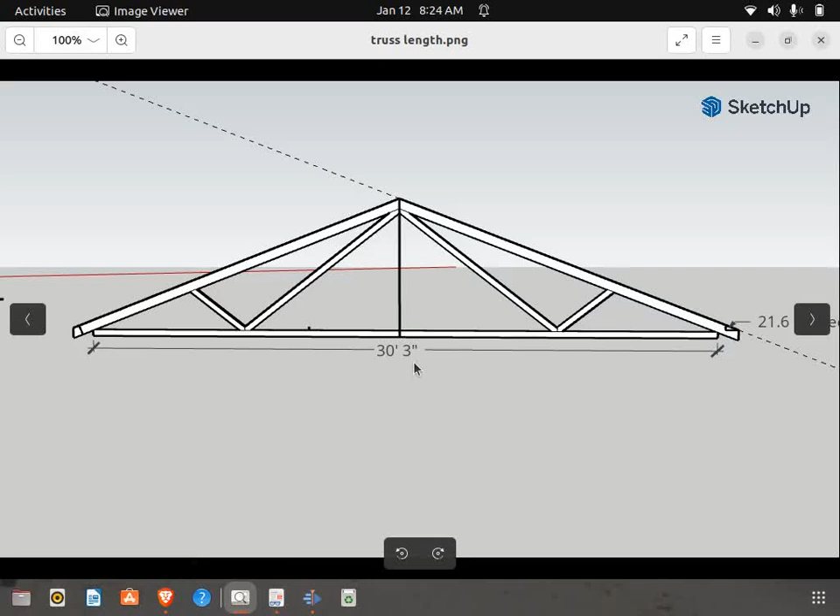We're going to be using a 2x4, which is 1.5 by 3.5, and a 2x6, which is 1.5 by 5.5. Please note there are 3 supplementary views. The first shows the length of that bottom board, which is 30 feet 3 inches. The second one gives the distance from the bottom to the peak, which is 6 feet 9 7/16. And the other one gives the angle for our 2x6, or 1.5 by 5.5, of 21.6 degrees.

You have the option to rotate that board using that measurement, or you can figure out other ways to do it. I just want to give you the most amount of information possible. Okay, so we're going to look over at our instructions.

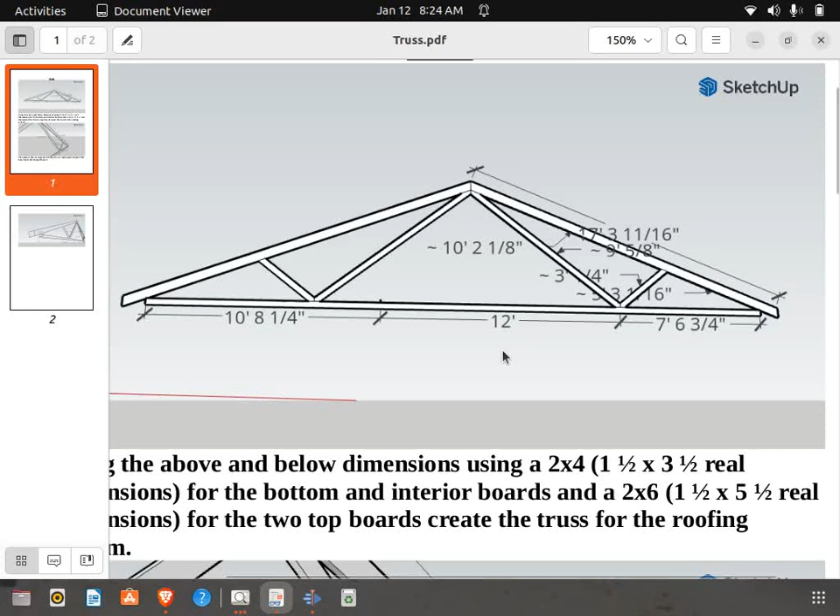The 2 main dimensions I'm looking at are this bottom board, which is 30 feet 3 inches, and the top board, which is 17 feet 3 11/16. So I'm suggesting that you start with those 2 boards.

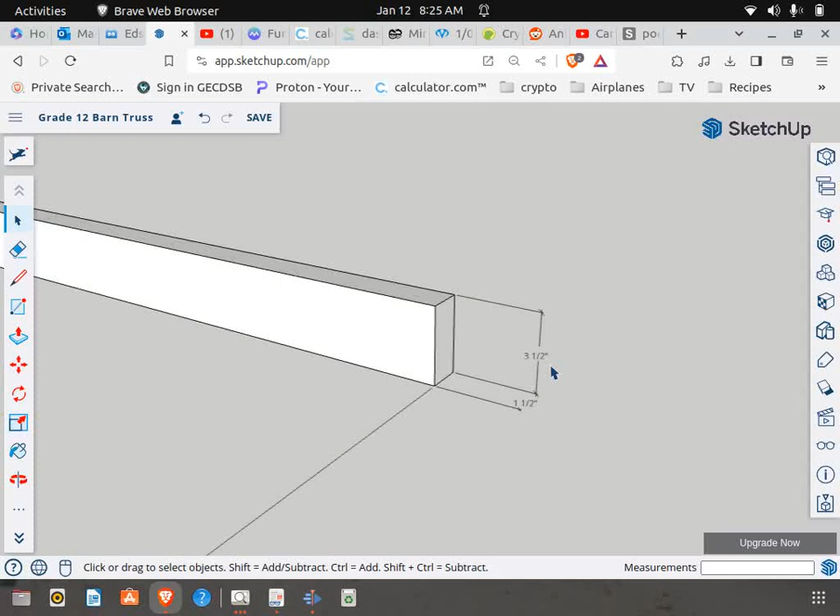Here's my 30 foot 3 inch, it's my 2x4, measuring 3.5 by 1.5. And this board is not to the dimension, the 17 feet, etc. I made a little extra just so that I've got some room to trim. And then you'll just edit that component.

So I'm going to remove the dimension tags or layers, and then we can work from here. Now the first thing I'm going to do is look at the supplementary view that shows that height, 6 foot 9 7/16.

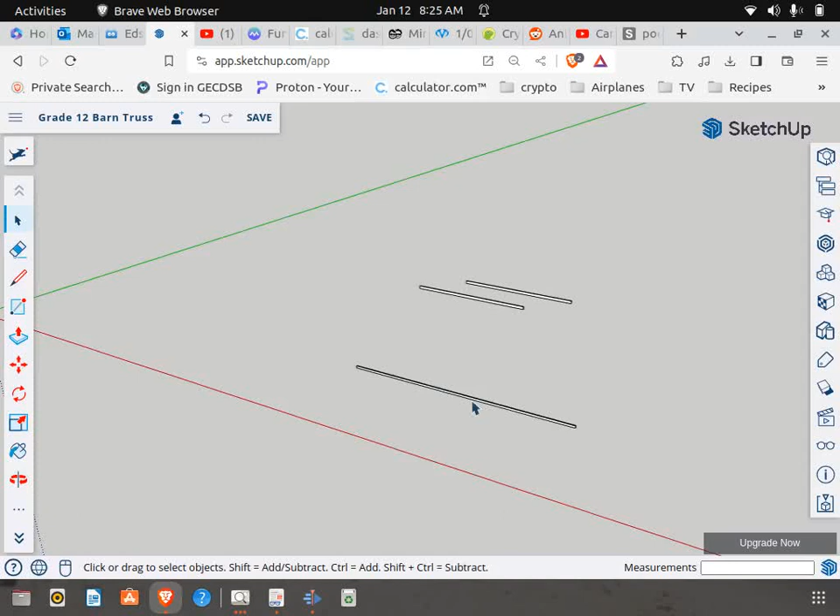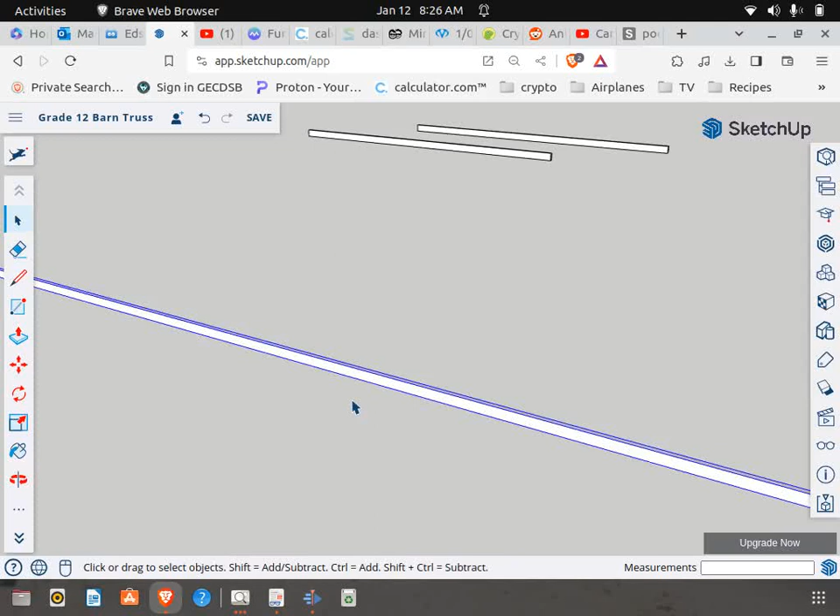Let's go over here, and I'm going to copy this board because we're going to need more than one 2x4. First thing I'm going to do is make this unique. Otherwise, your changes will be felt in all the other copies. Let's go into edit component mode.

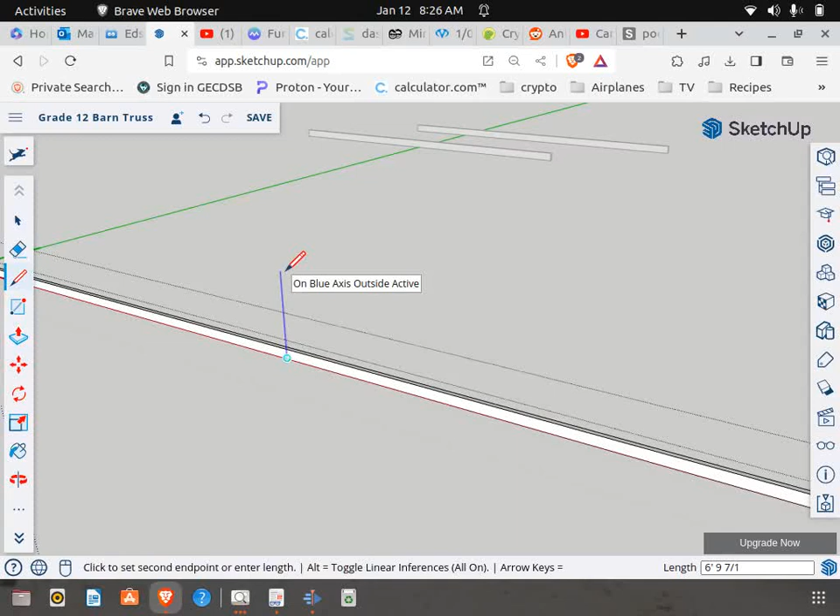That's 6 feet 9 7/16. Let's find our midpoint. Okay, so 6 feet, space, 9, space, 7/16 inches. There we go, that's the height.

Okay, so we've gotten started. Let's look at our supplementary view that gives the angle. I'm going to rotate that 21.6 degrees.

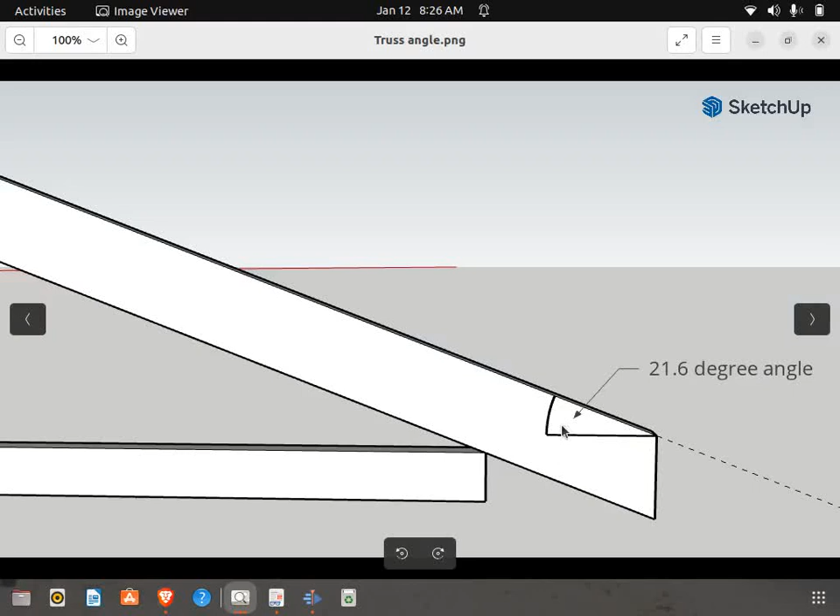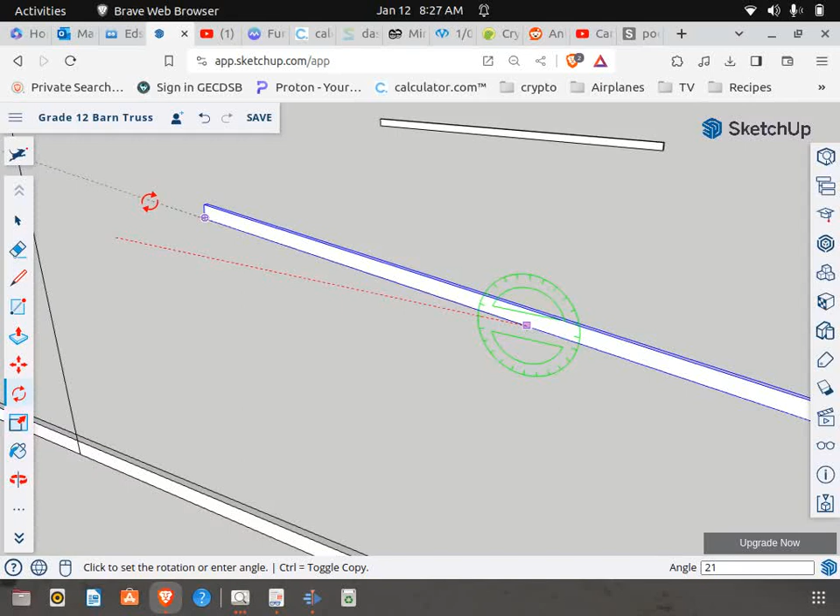Let's grab one of these and bring it on over. .6, enter.

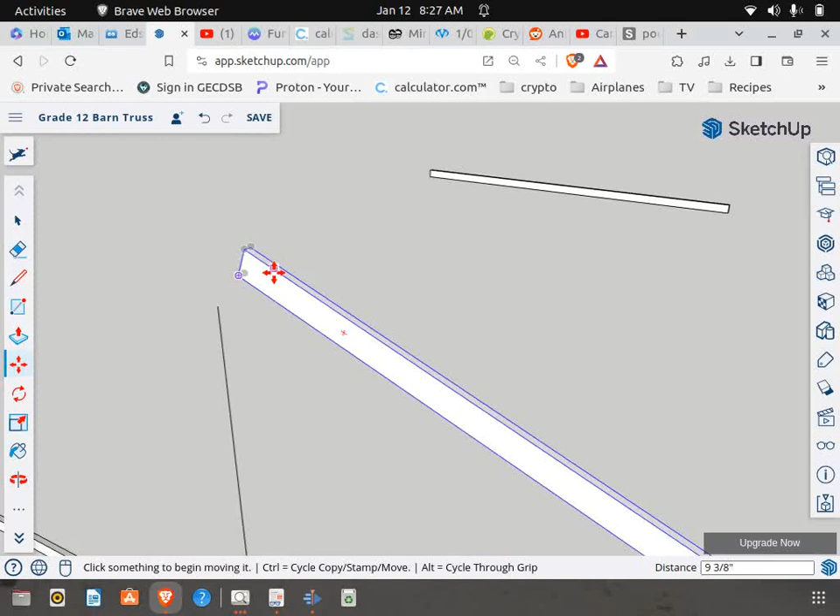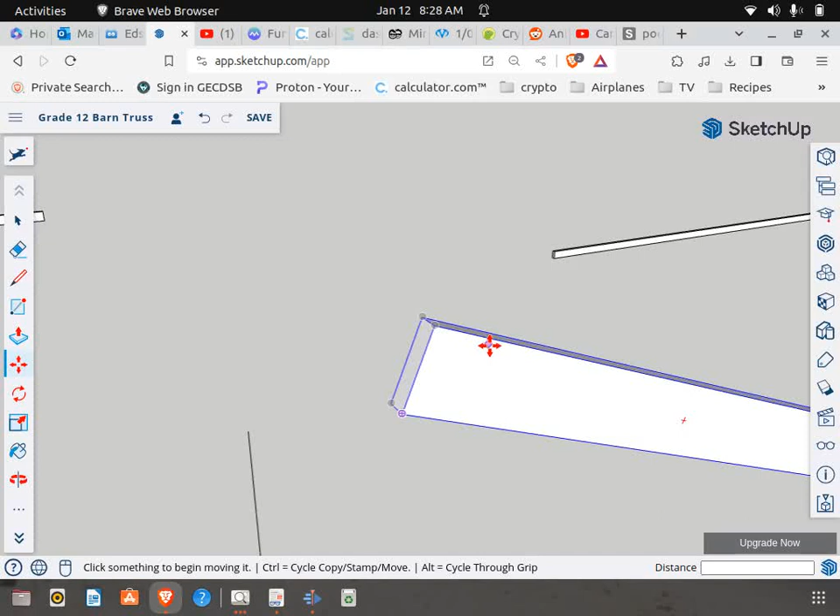Let's see how this lines up. Let's grab this along the top line and get it to intersect with our top line here. If it doesn't quite work for you, move it around. Let's move it this way. There we go, now it's touched.

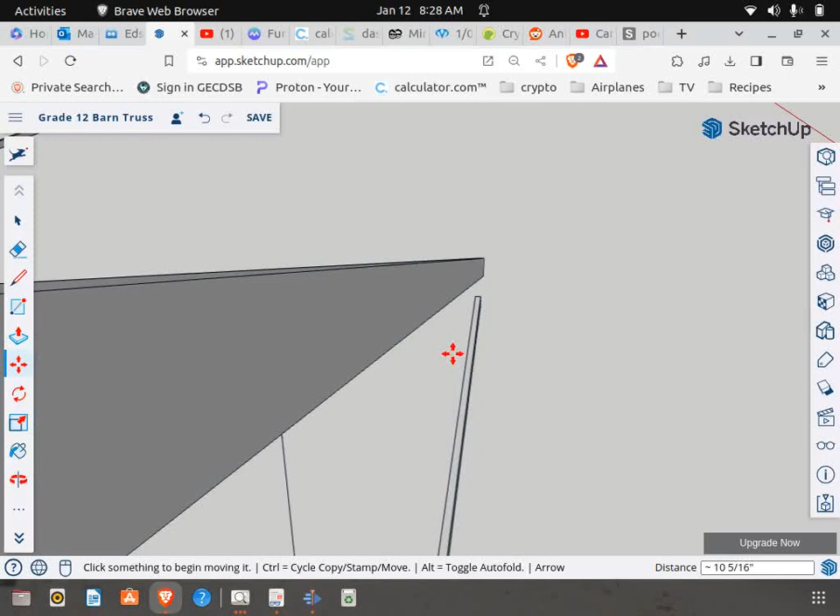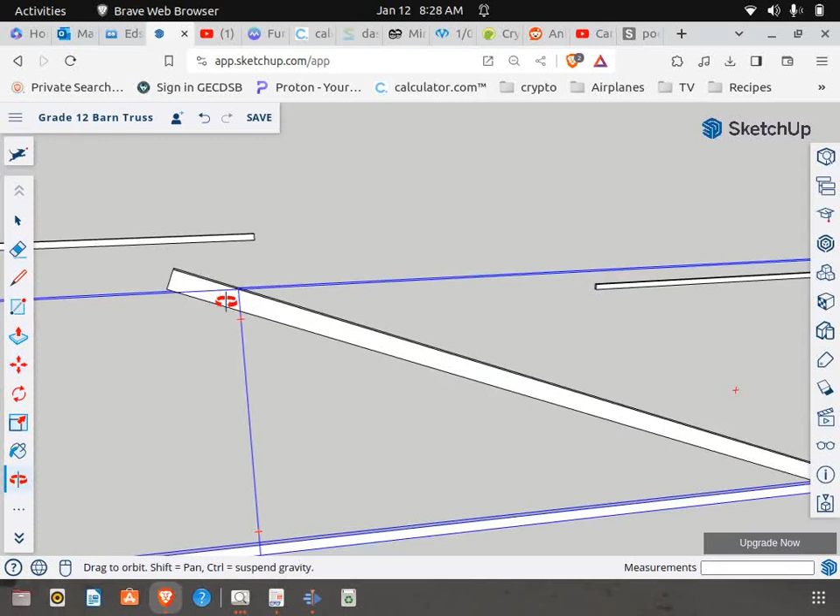Let's see if we can just get that to move down. Okay, endpoints there. Now I suspect we got a little too much hanging off this way. I only made this 19 feet, so let's kind of bring it over this way.

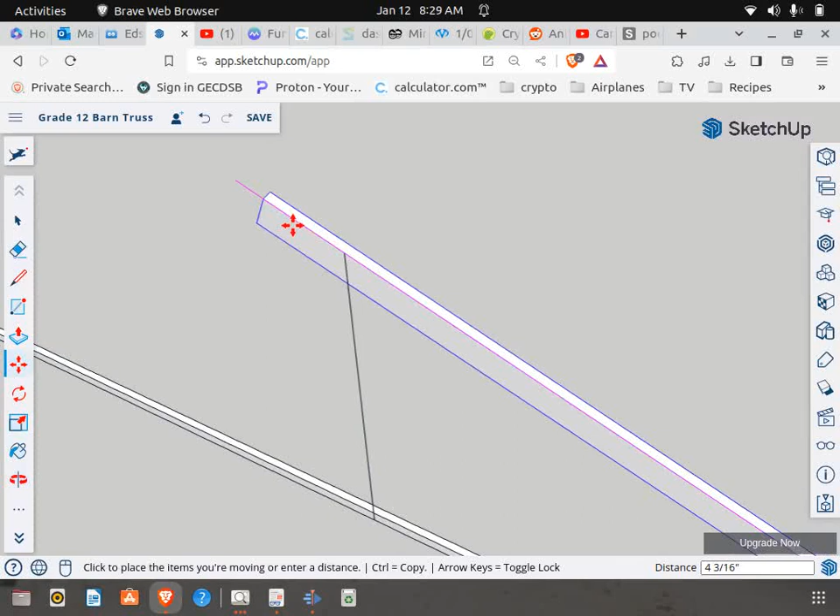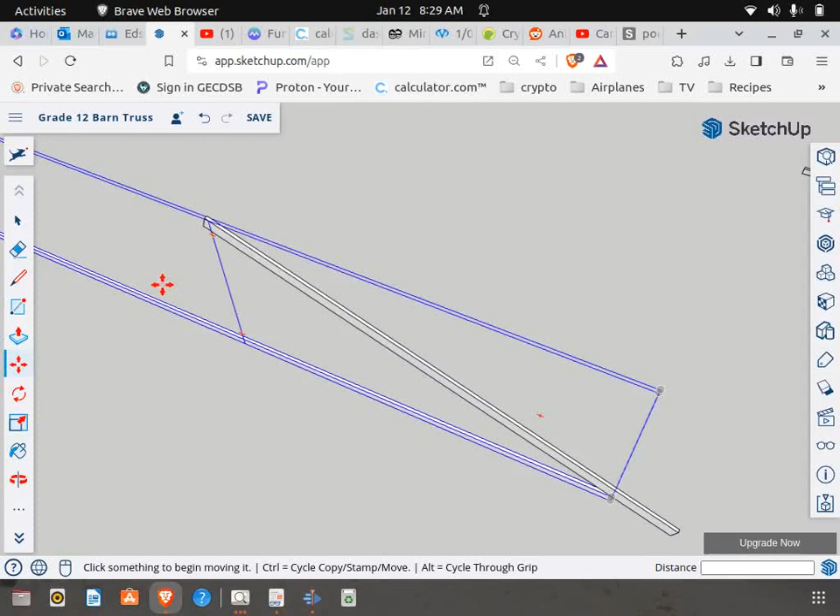Now what we can do is we can trim this up, and I'm going to start with the very top.

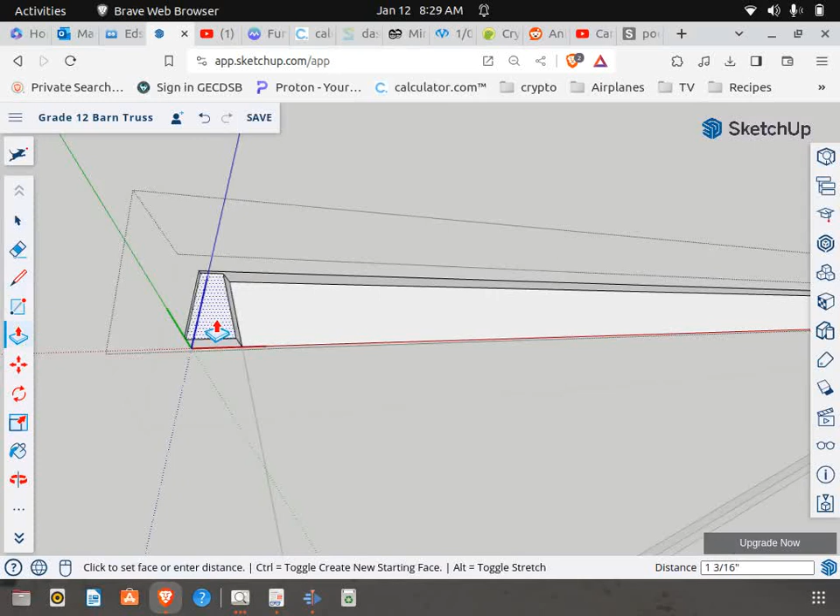Let's go into the edit component, but let's make this unique. Edit this. Now this line is outside of the active, so we're going to draw over top of it, and we're going to make this disappear. Okay, so we've got the first part.

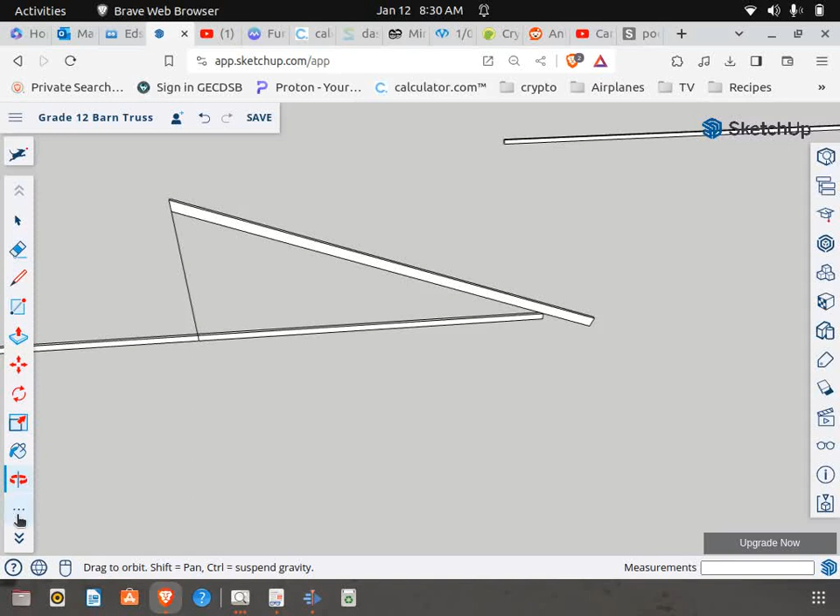Now let's go back to our different views. So this is 17 feet, 3 11/16 from the point. We've just finished the point, so let's get our measurement tape out, 17, 3 11/16. Okay, there's our mark.

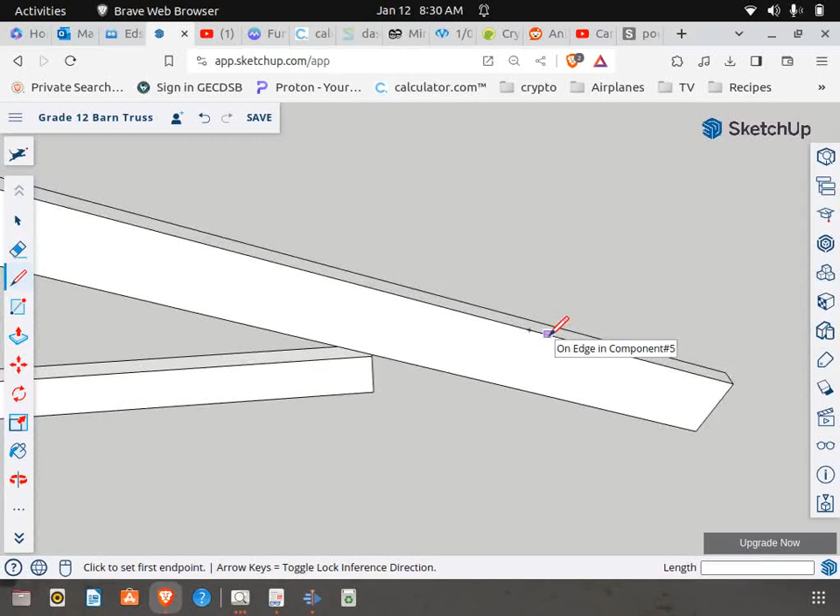Now I made that measurement outside of the active, so when we move this, this little measurement is going to be hanging in space. That's okay. If that's not something you want to see, make sure you do that measurement inside edit component mode.

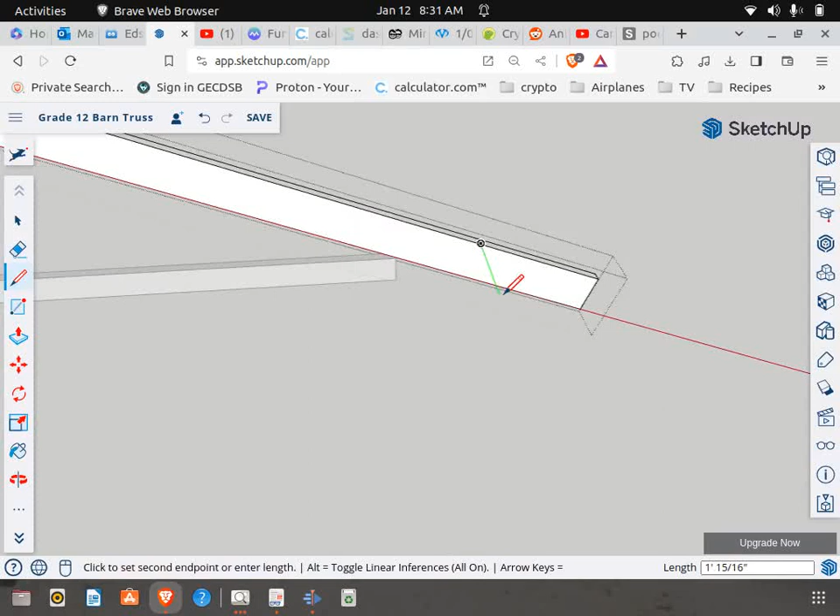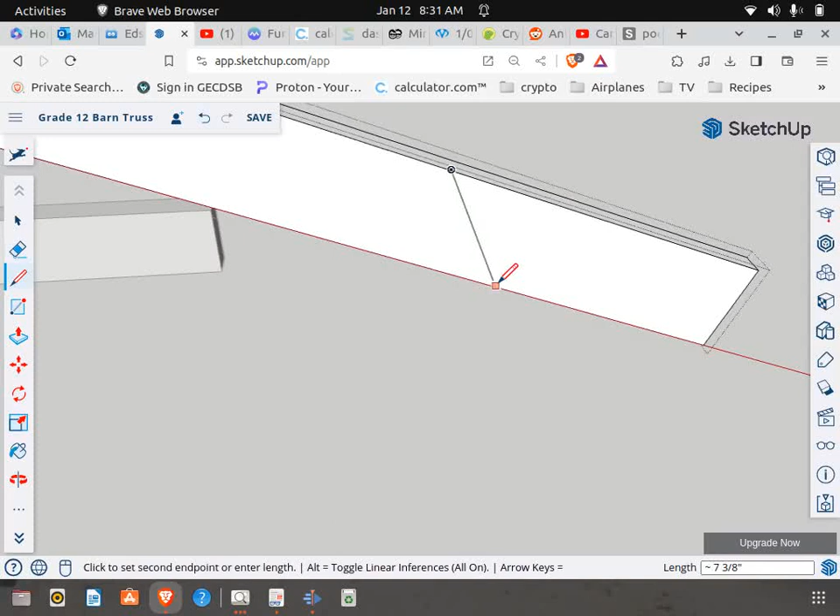Let's see. Let's just rotate this to see what... yeah, it's not.

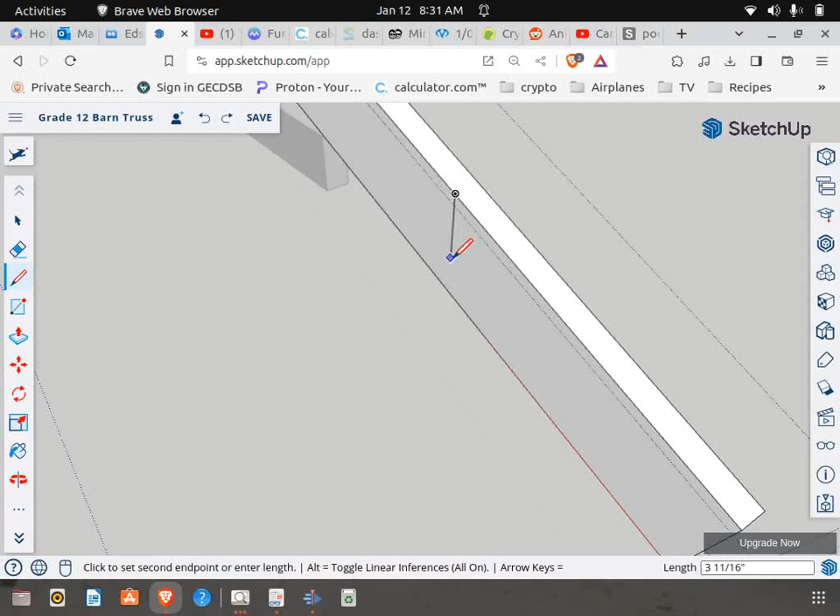Let's give it a better perspective. Push this over. There we go, that'll work.

Okay, so we've got that created.

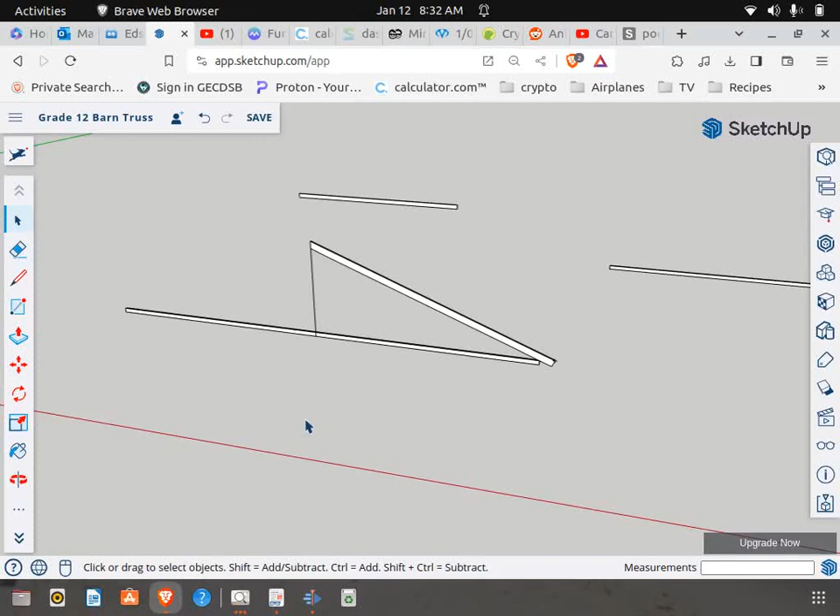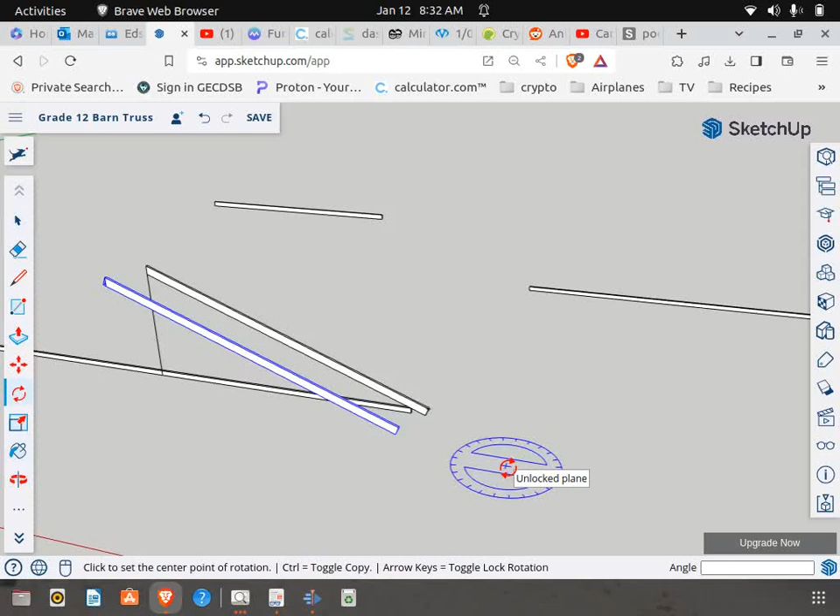Now what we're going to do is just copy that and place it on the other side. Okay, I can't find a flat spot on this thing, so the best way to copy this without it going everywhere is make it blue, place the rotator flat here, don't bother touching there, make sure this is blue, flat, and we're going to rotate this 180 degrees.

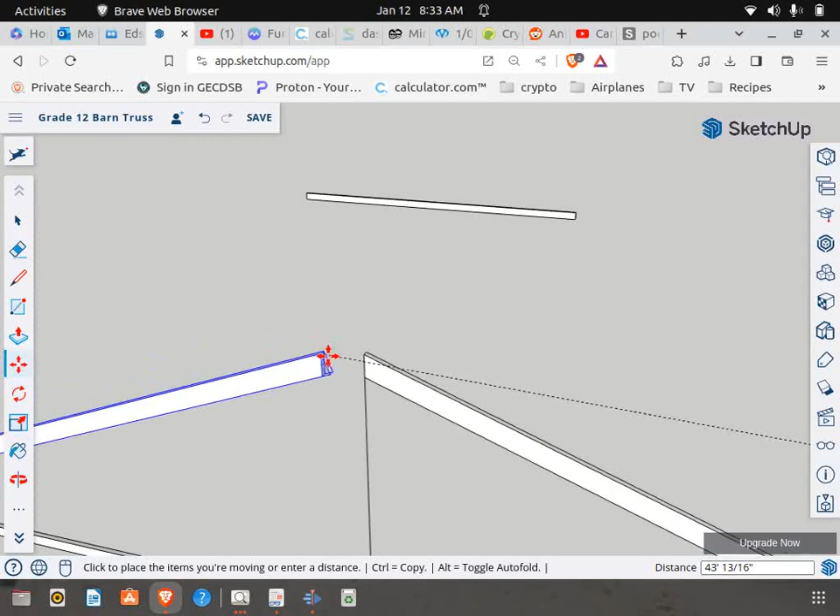Let's grab the point, and corner and corner should intersect like so, and it should look the same. There we are.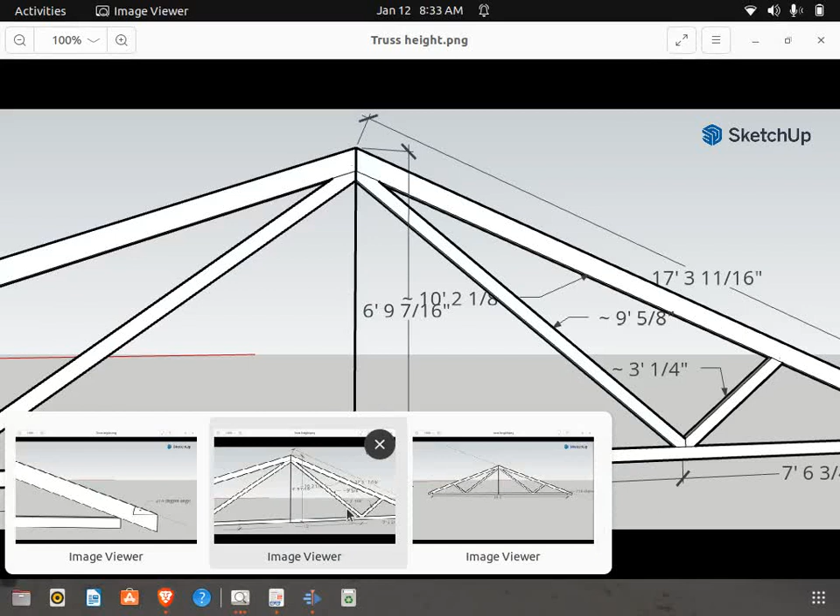Okay, so let's look at some of our supplementary views. I think we're pretty much done with that. So now let's go back to our instructions.

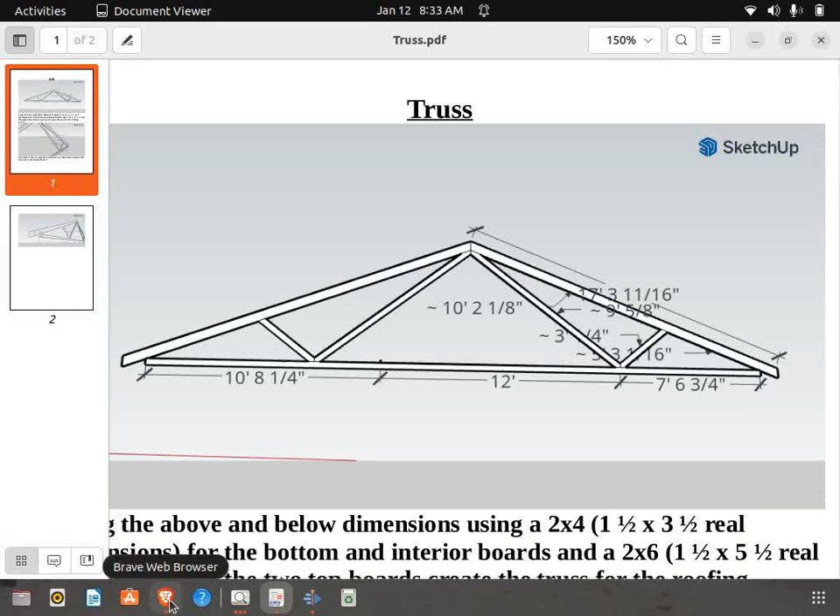This gives the location of this intersection point, which is 7 feet 6 3/4. So let's use that, and that's from the edge. Okay, let's go into edit component mode to do this.

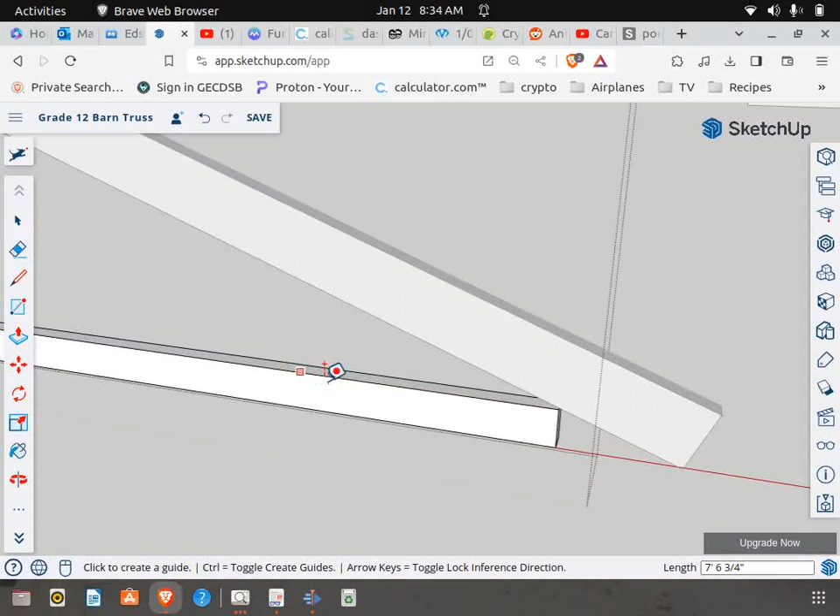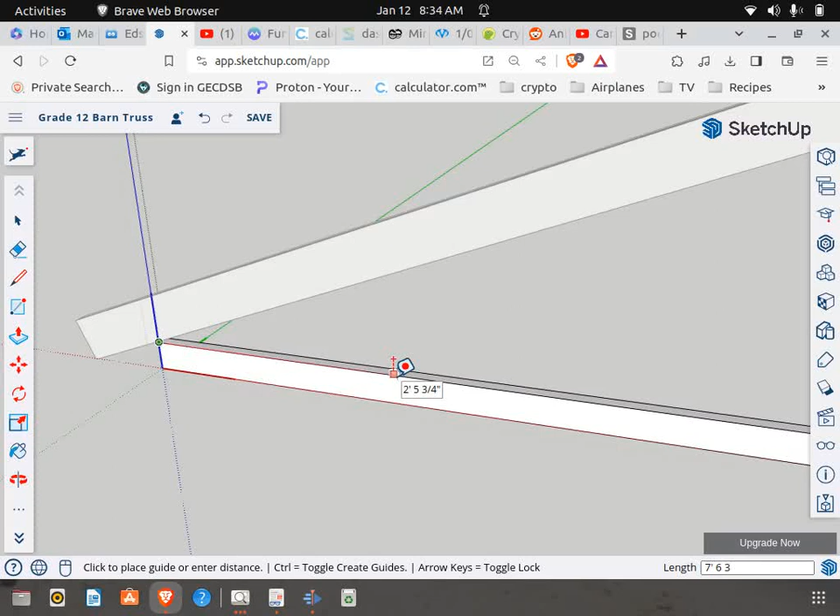Now, this is a mirrored image, so we're going to do the same thing over here, using that measurement there, over here, 7 foot 6 3/4. Okay, that's our intersection point.

At this point, it's worth adding there is an additional supplementary drawing which shows the angle of the interior boards and also the vertical height where they intersect. Those are some important bits of information. So I'm going to start with that line height there, go over here, that's 2 1/4 inches.

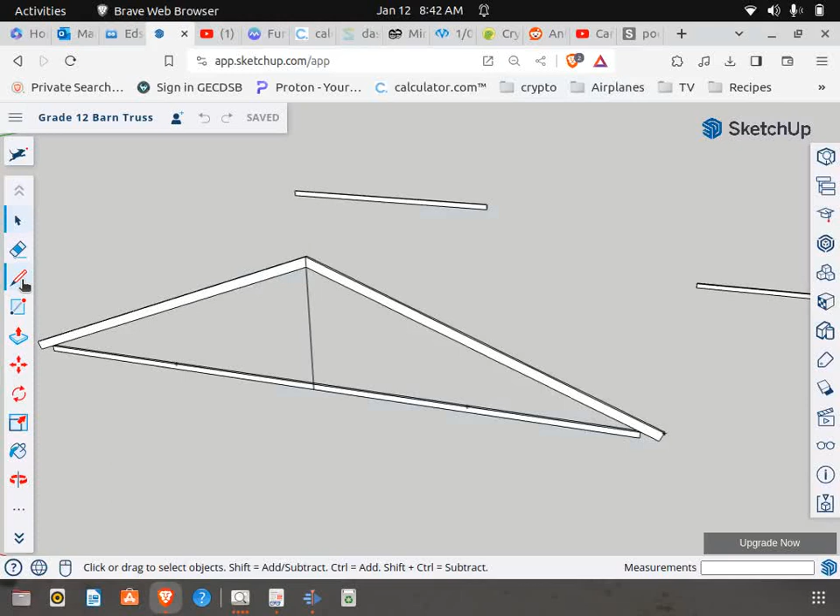And whatever I do on this side, I'm going to do on the other side.

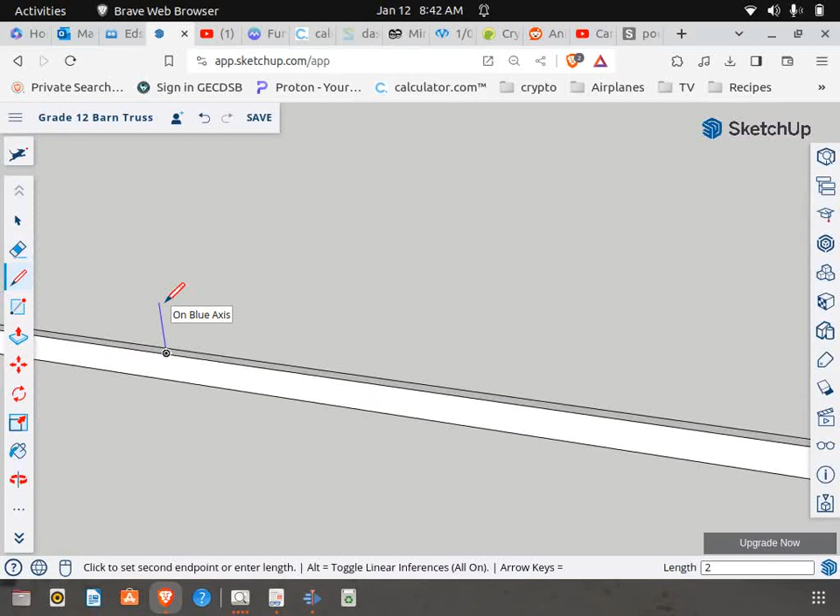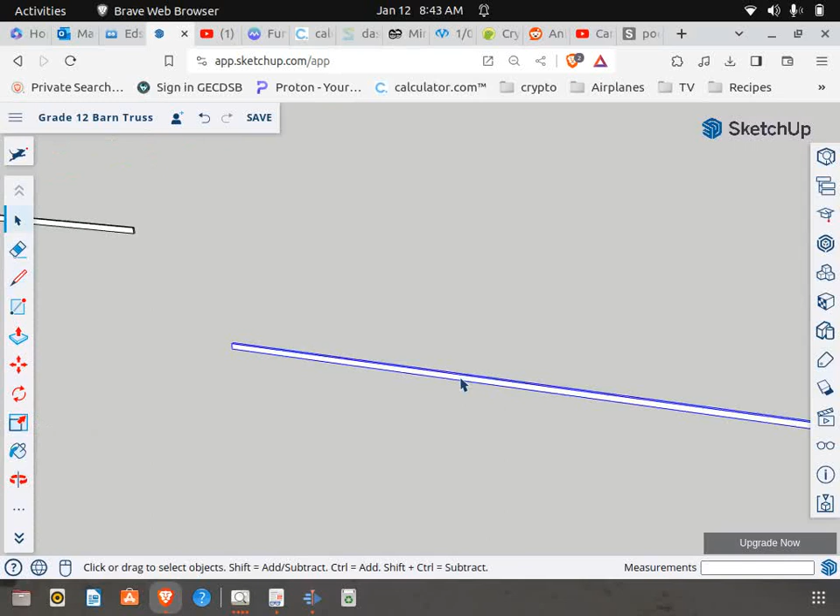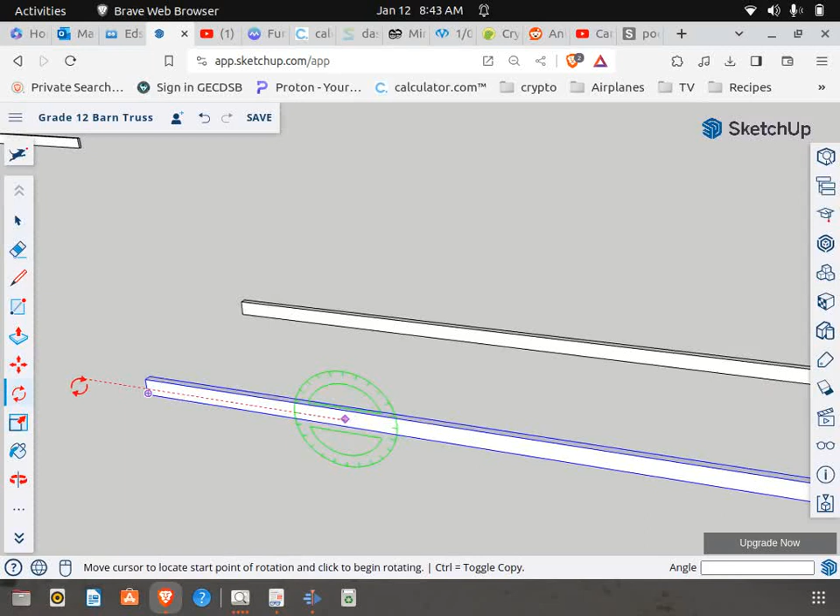Now that supplementary view tells me the boards are 38.3 degrees. So I'm going to grab my board over here. Now obviously this board is going to be too long, and that's okay. Let's make sure it's already unique. It is. So I'm going to need more than one, and make this one unique, so they're each going to get turned 38.3.

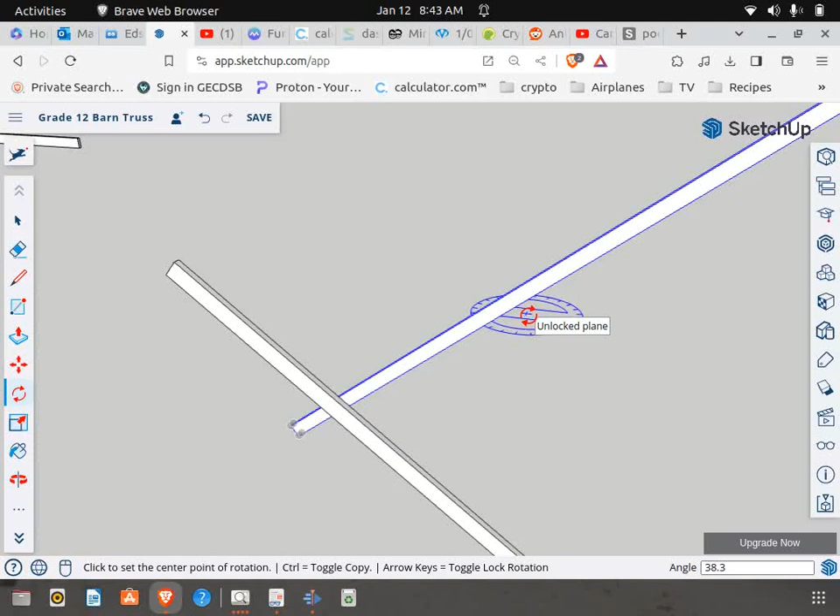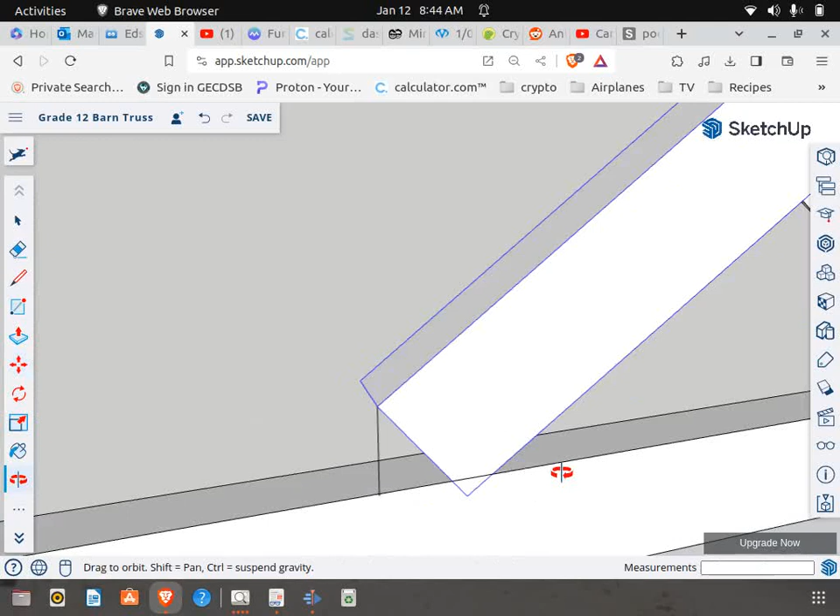Make sure you make that blue if you're going to move it. Let's grab this and stick it right there. Or what you could do, yeah, just do that. There we go.

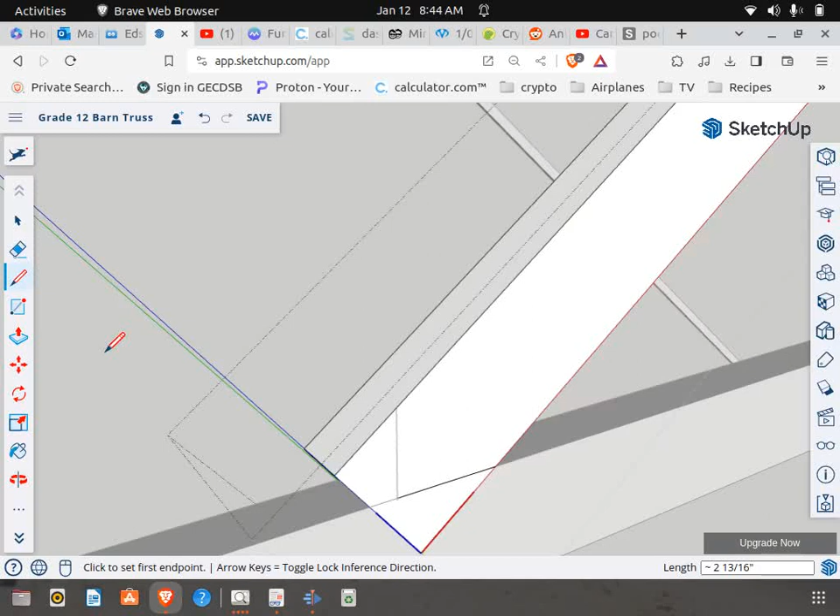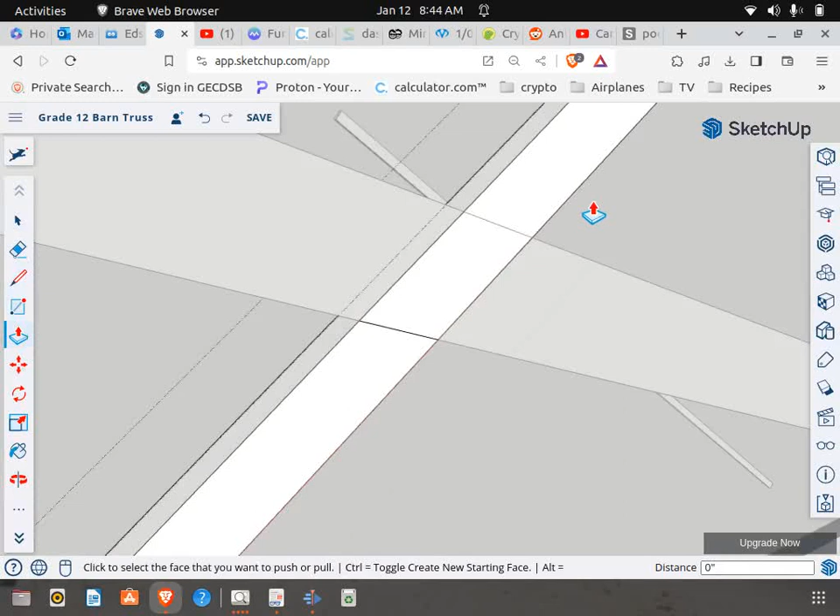So that placement is good. I'm going to edit this. Now let's push this all out of the way, and edit this over here.

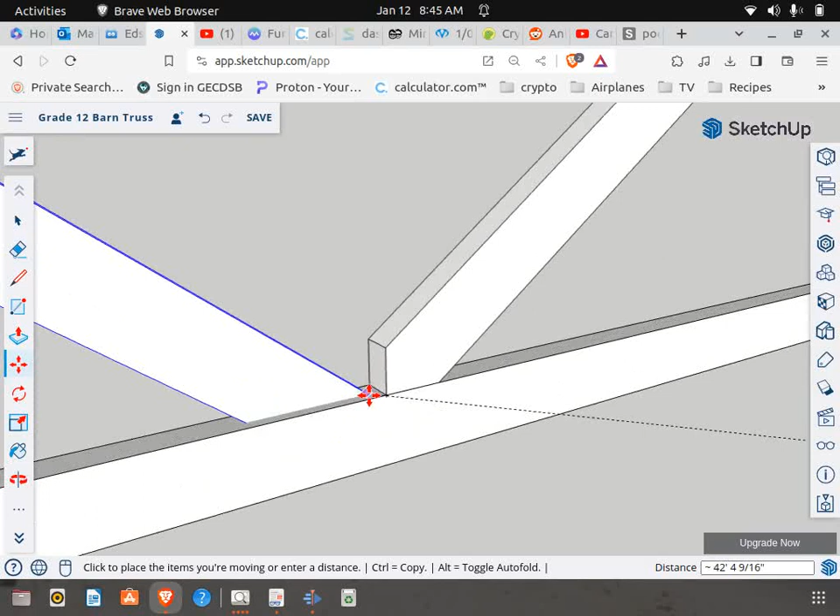First board is in place. Let's grab our second board. Get that to intersect.

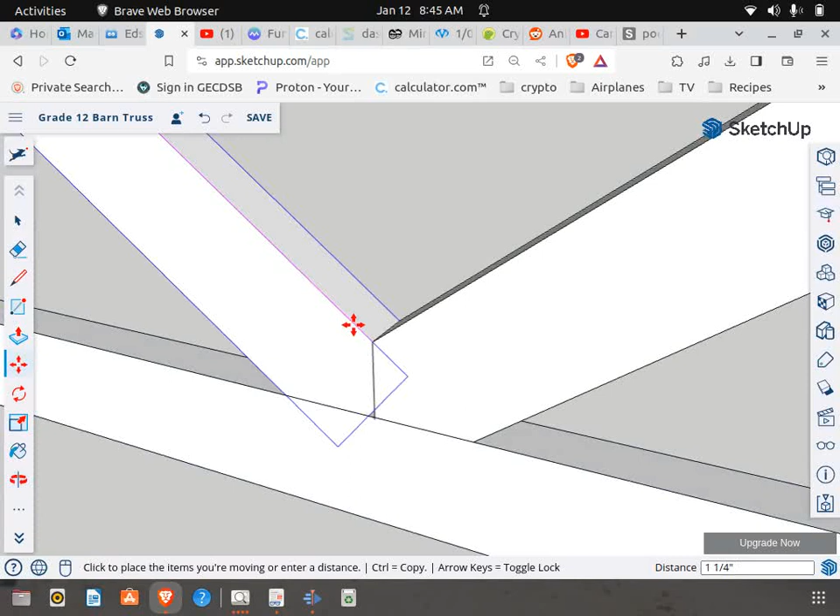Now it's worth mentioning, if you are having trouble getting this to move down, just intersect it here, go into edit component and push this down if that becomes a problem. Let's edit this component.

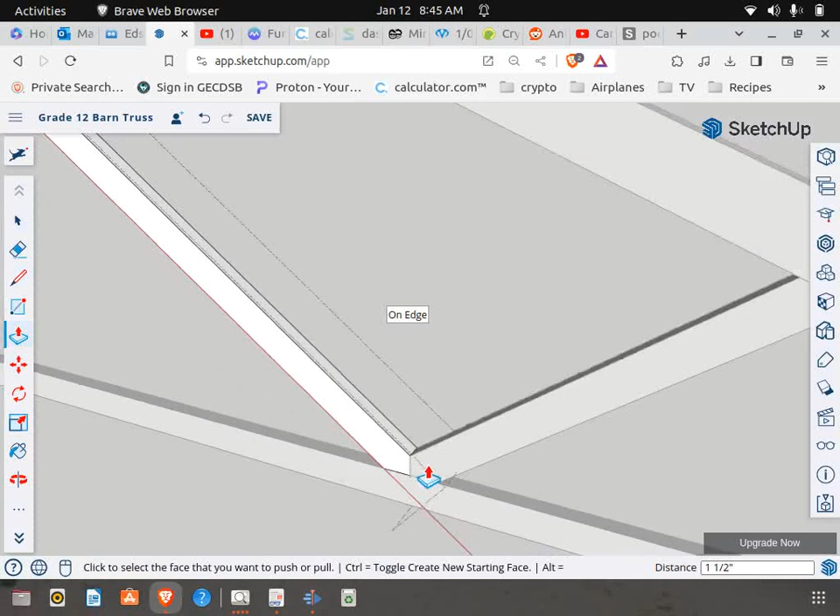Let's push this stuff out of the way. And I'm going to leave that for now. Or actually, no, I'm not. I'm going to trim that at the midpoint, that middle line there.

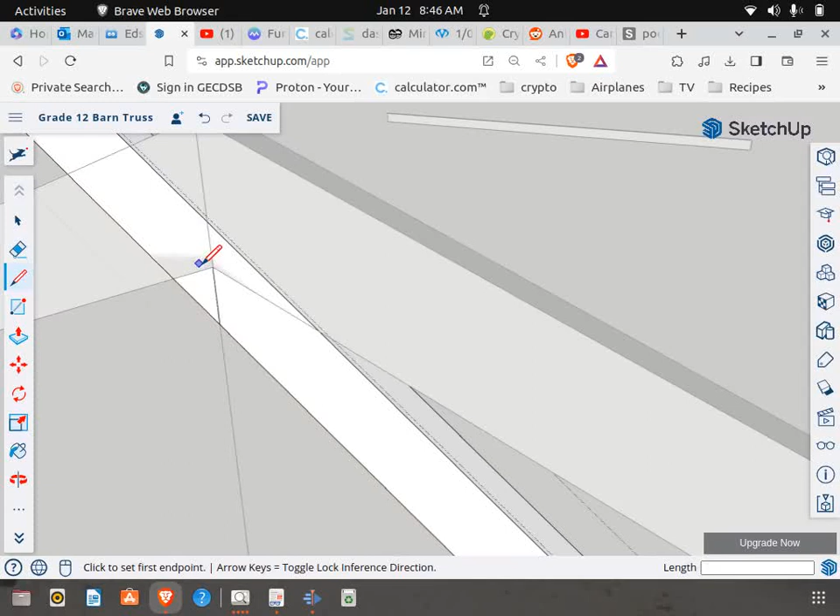So let's just go here and to here, and let's push this over.

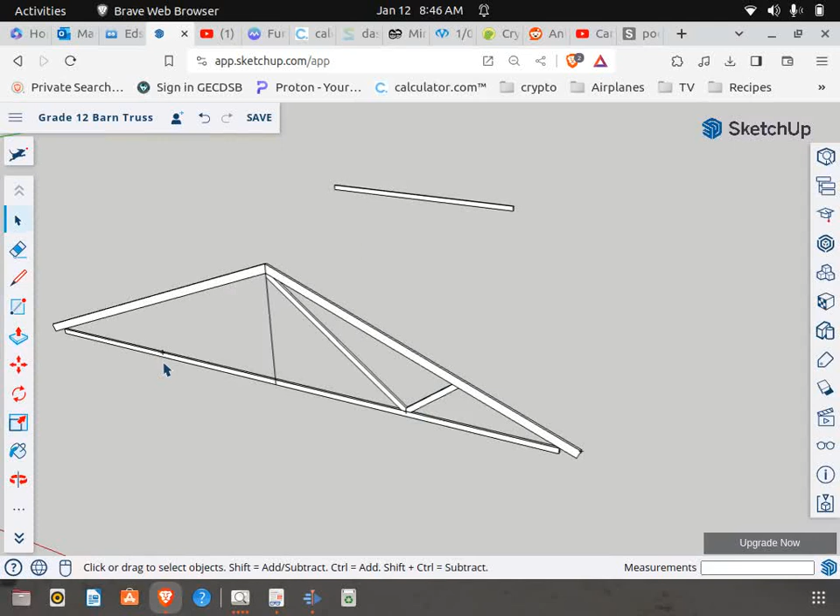Now, this drawing is symmetrical, so all things being equal, we should be able to take these, copy them, rotate them, and place them over here. So let's do that. Copy this, okay, make it blue. While it's blue, place this flat on the ground, like so. Rotate it flat, and I'm going to rotate it 180 degrees.

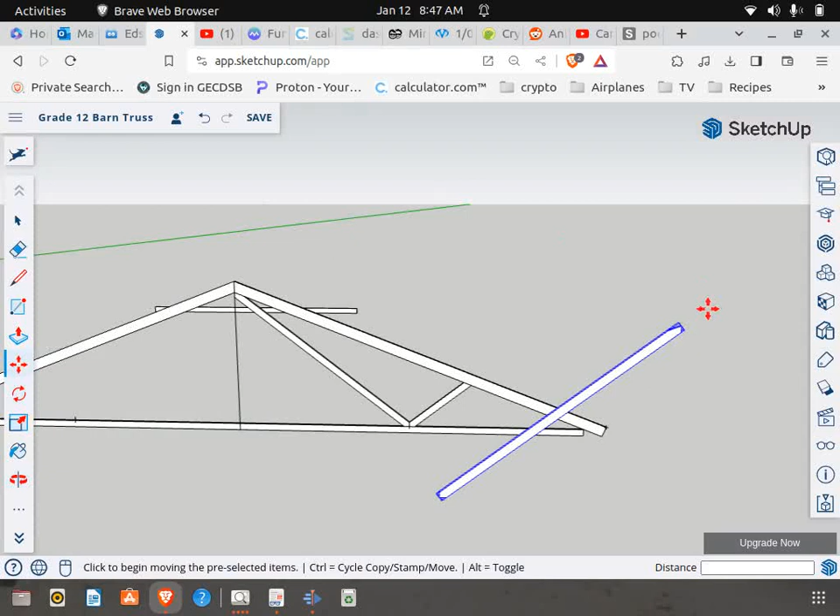Let's see. Intersect the corners, and that intersects correctly as well. Okay.

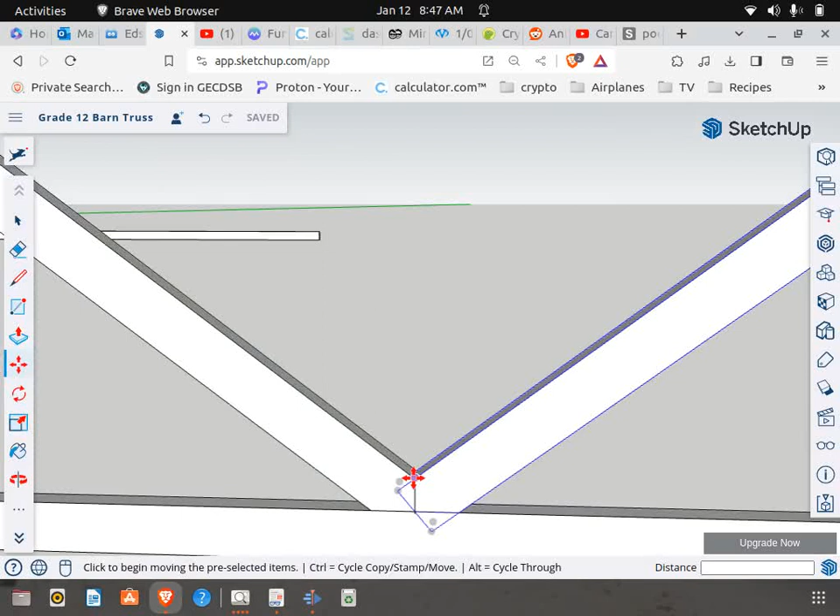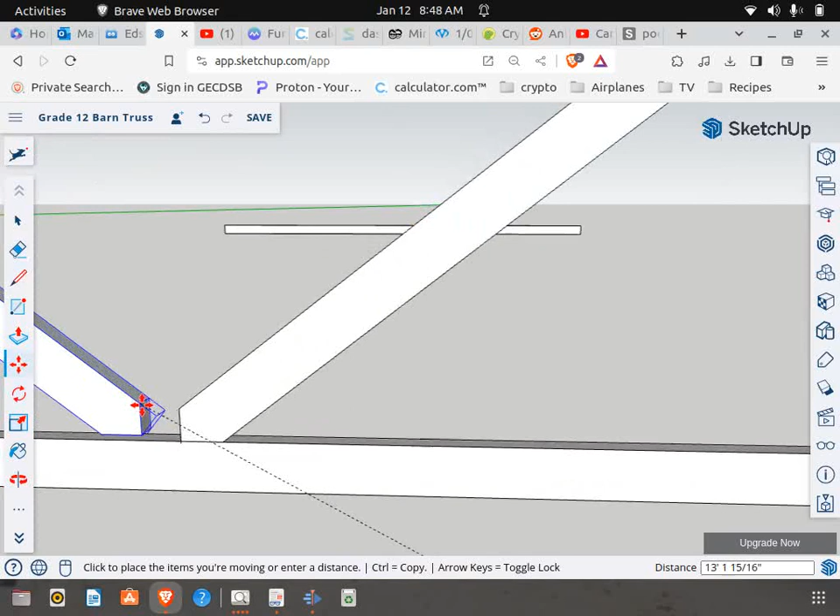So let's make this one blue, copy it. While it's still blue, let's rotate that 180 degrees, and grab it by a corner. So that should intersect with this corner, and it should blend nicely up there as it does.

At this point, we can remove that middle line. Now I made that inside this portion of the component.

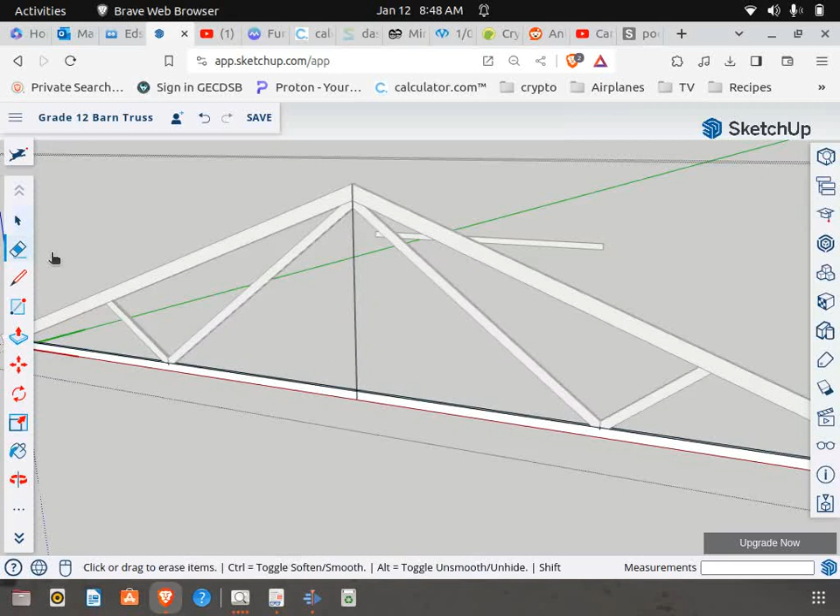Now is the time to add your dimensions, but I'm not going to do that for the demonstration. What I am going to do for the demonstration is we have a series of individual components, but you're going to want to be able to put this on your barn as one component. So now what you'll do is you'll go over top of this, and you're going to make this a component.

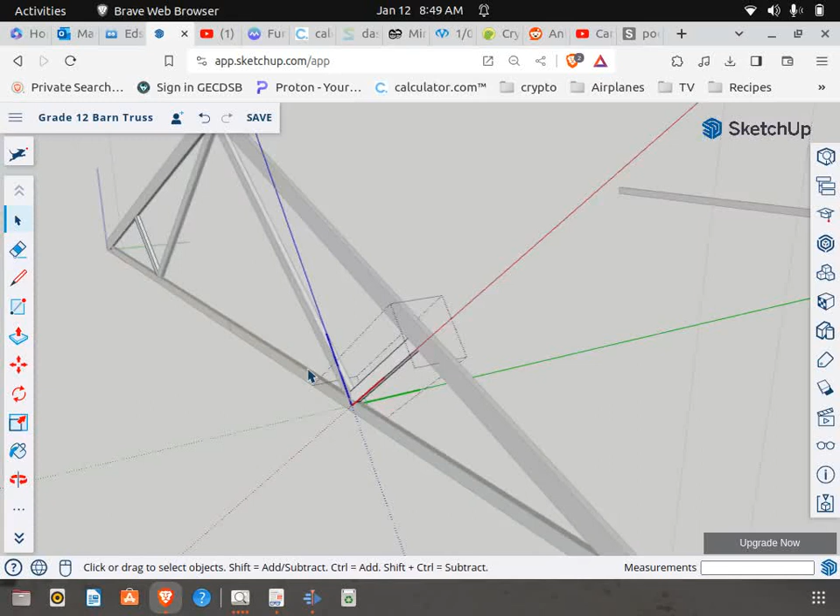So now you can move this as a whole. Now at this point, and any point after, you're going to have to keep in mind that if you want to make modifications, you will have to go edit the component. And let's say you want to edit this, you'll have to go edit component once again to edit that. So you've got components inside a component. That's important to keep in mind. That's it.